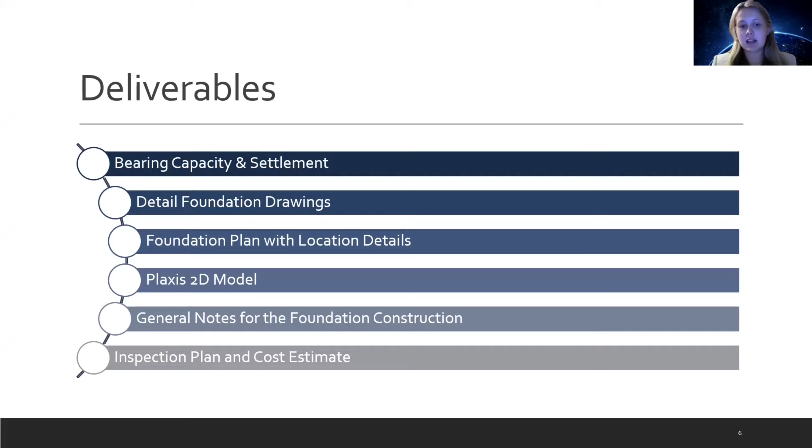The bearing capacity and settlement and the detailed foundation drawings are both completed. The foundation plan is done, and the cost estimate is almost complete. The Plaxis 2D model and the general notes and inspection plan will be completed soon.

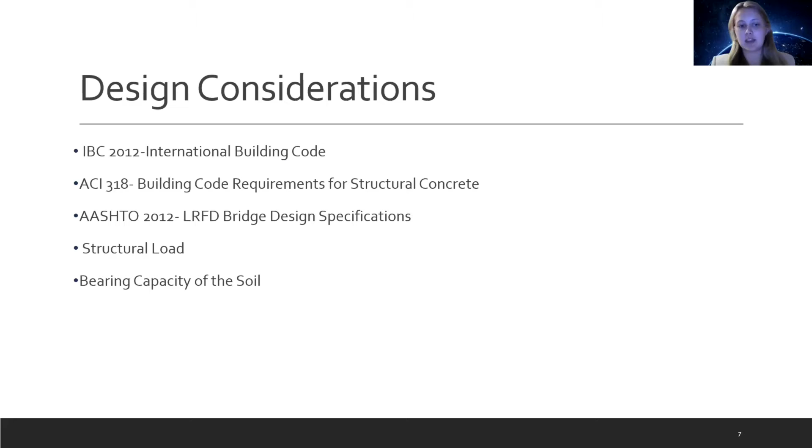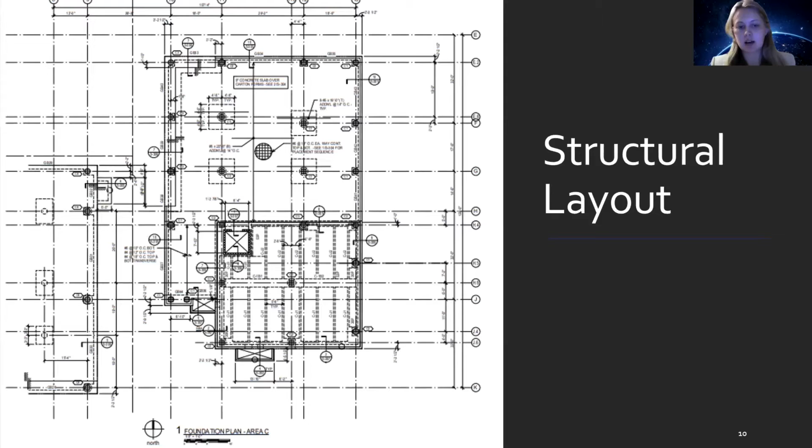For the preliminary foundation design, 2 foundations were considered: pile foundation and a shallow foundation. Here's the formulas used for the pile foundation to find the allowable load.

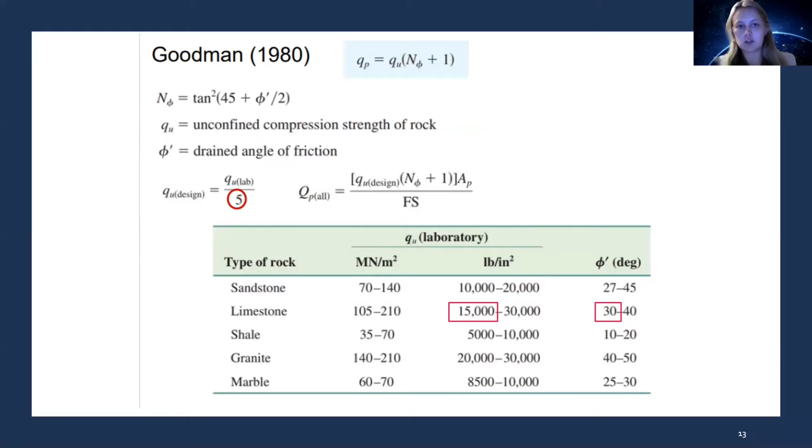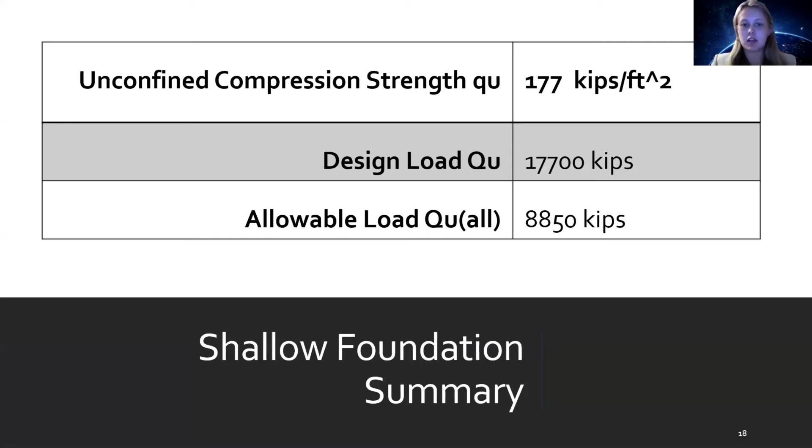The shallow foundation initial calculations resulted in an allowable load of 8,850 kips. Between the 2 of these, the deep foundation would have a much larger cost and more equipment is needed, when the shallow foundation is capable of handling the loads needed and is more economical, more cost-effective, and needs less material. So the foundation used will be a shallow foundation.

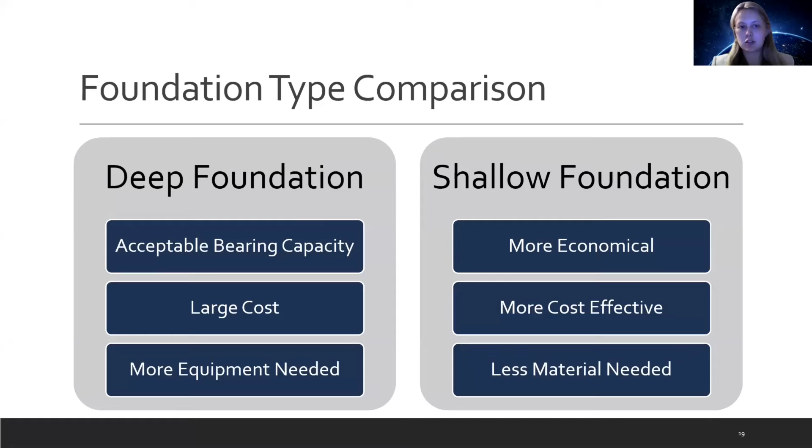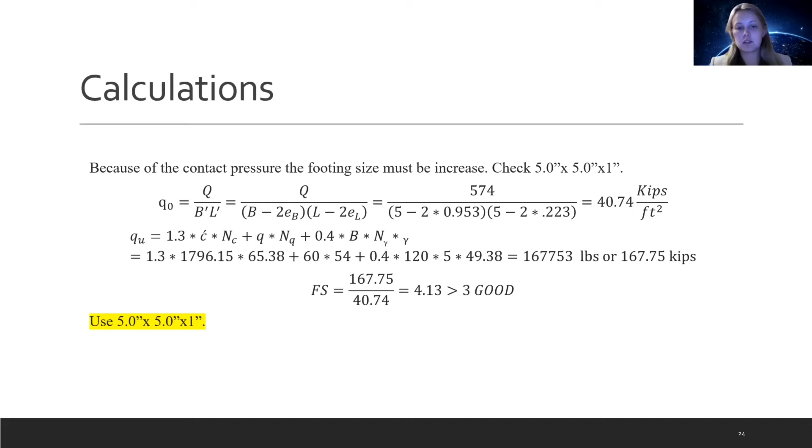Following is the shallow foundation detailed design. Here is the calculations. The foundation is to be 5 feet in both directions and 1 foot deep. That gave us a factor of safety of 4.13, which is greater than 3, so it was sufficient.

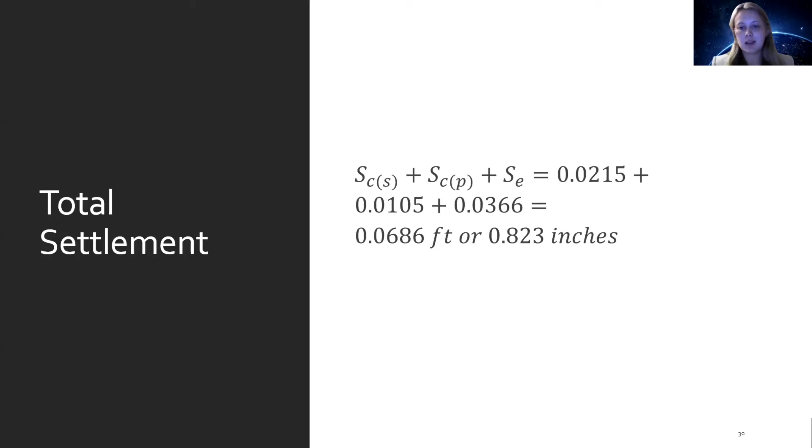Next, we checked for the settlement. The total settlement was 0.823 inches, which is less than 1, so the settlement was okay. Here are the design drawings.

The square foundation is 5 feet on both sides and has a thickness of 1 foot, and the foundation is 2 feet deep. The column dimensions provided by the engineers at K16 Consulting was a circular column with a diameter of 3 feet, so that's shown in the picture as well.

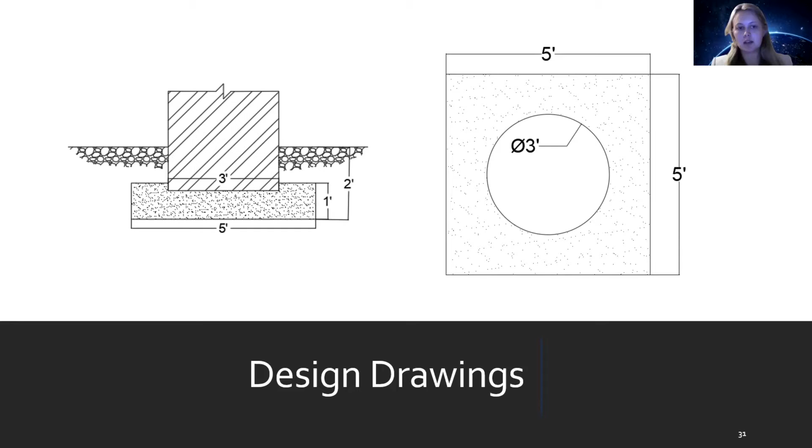Here is a breakdown of the cost estimate. The subtasks are separated, and the unit cost for each subtask, along with its coordinating number from the cost manual, is shown, and the final cost will be about $3,600 plus whatever the weight of steel is times 1,900.

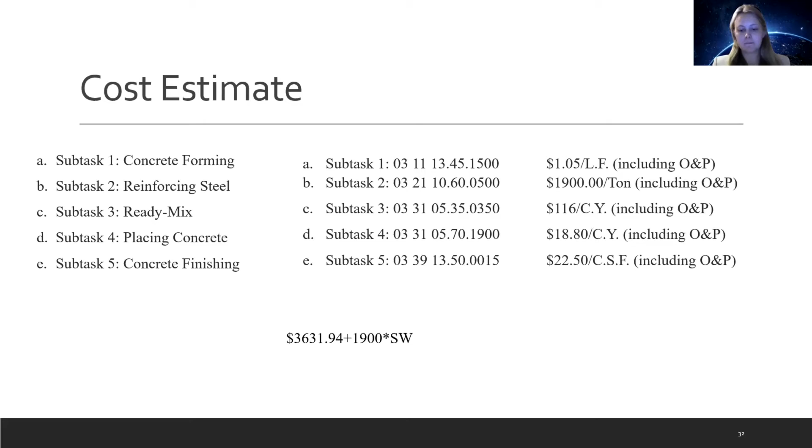Because of a lack of time, I have not yet done the steel design for the concrete footings, but that will be done shortly. Using the footings, there are 2 options that are being considered: a traditional concrete mix and a recycled aggregate mix.

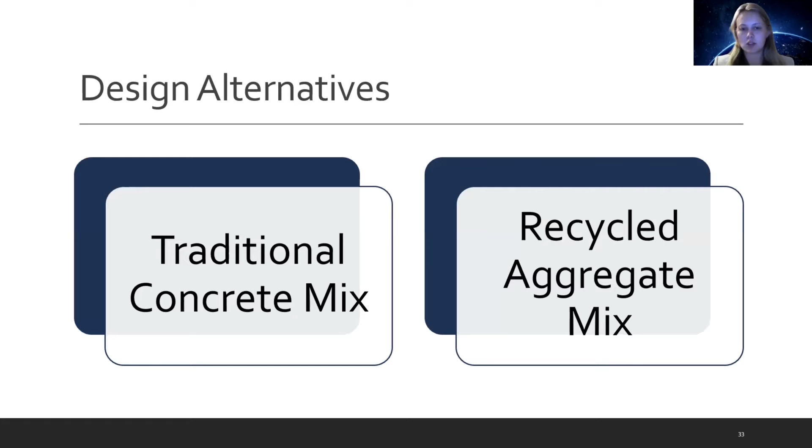The cost between the 2 will not be much different, and they'll all have the same dimensions. The only thing that'll change is what's used for the concrete mix.

The advantages and the obstacles to using a recycled concrete mix are listed below. Some of the advantages are minimizing the use of resources and supporting local economic diversity and reducing pollution from using old materials. And some barriers include the clients not wanting to use recycled aggregate due to the lack of implementation,

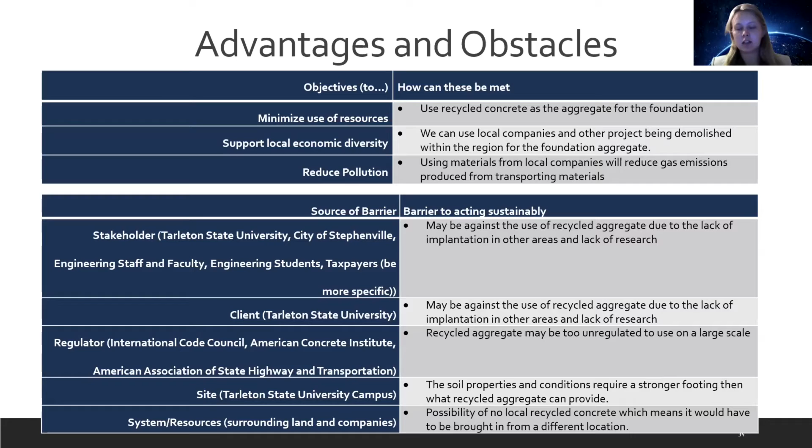or the site needing a stronger footing than what recycled aggregate can provide. So all of these will be taken into consideration when deciding between the traditional mix and the recycled aggregate mix.

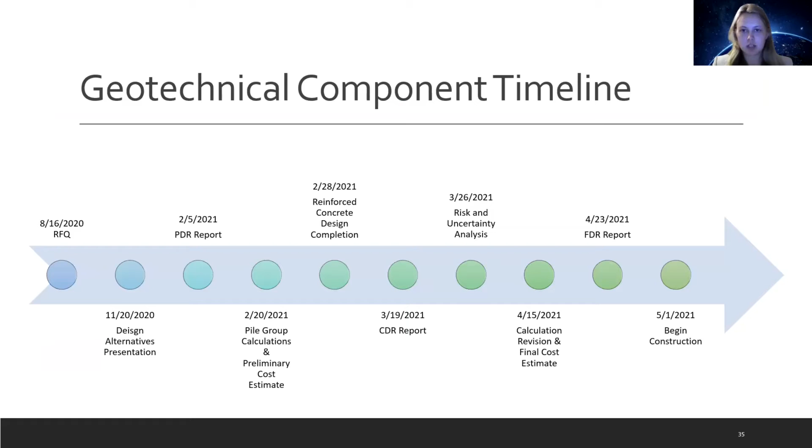Here's the geotechnical component, and I will now hand it over to Jonathan to talk about the transportation component. Thank you. Hi, my name is Jonathan Mink, and I will be talking about the transportation component portion of the project. The design objective is to design a new parking lot for the new engineering building at Tarleton State University.

The deliverables of this project will be a pavement thickness for the new parking lot, along with a joint and steel design. There will also be detailed drawings showing what the parking lot will look like, and a concrete mix will be designed along with a cost estimation for the parking lot.

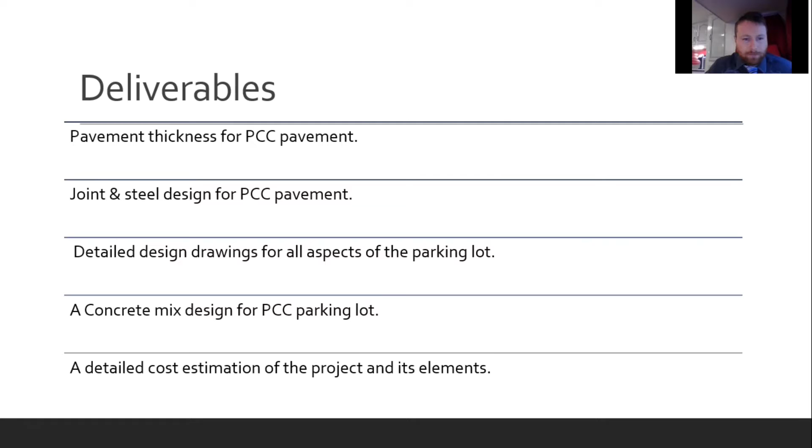The design considerations will accommodate about 45 total parking spots with 2 handicap parking spots closest to the new engineering building. There'll be a 6-inch curb running around the length of the parking lot to help manage storm water runoff, along with a 2% slope.

The total area is just a little over 26,000 square feet, with a 4-foot sidewalk running closest to the length of the new engineering building. There'll also be 2 semicircles in the middle of the parking lot on opposite ends, helping provide a green, sustainable design that reduces cost for the parking lot by subtracting steel and concrete.

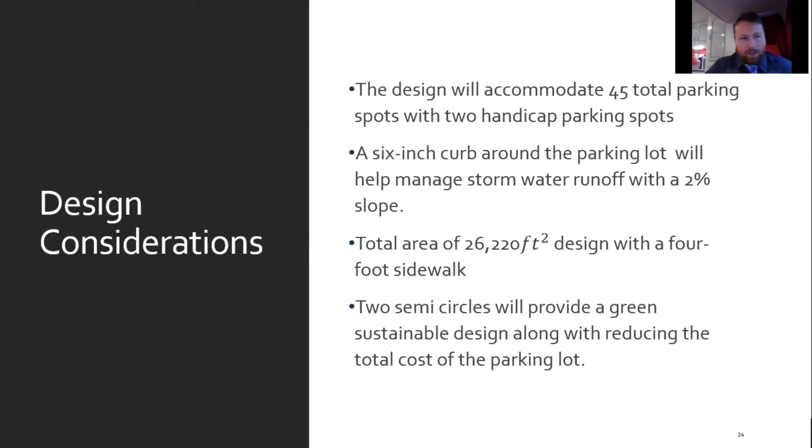Along with the area of a little over 26,000 square feet, it will require 389 yards of concrete to finish.

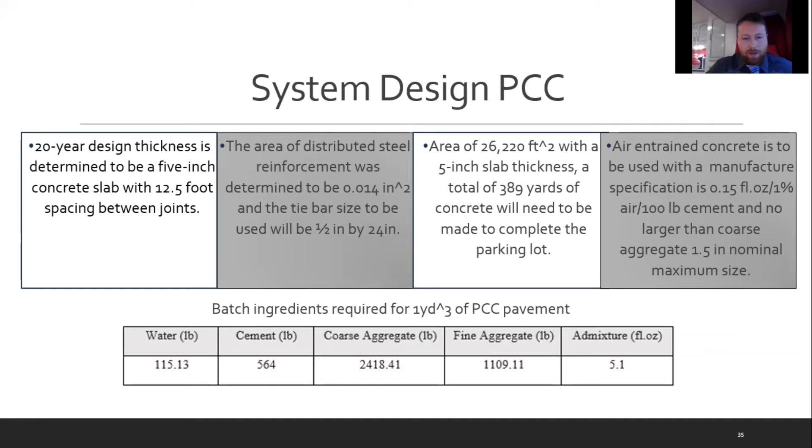An air-entrained concrete will be used per manufacturer specifications, with 0.15 fluid ounces per 1% of air per 100 pounds of cement. For 1 yard of batch ingredient, it's shown in the table at the bottom of the slide, showing how much material in pounds and ounces will be needed per yard of concrete.

The parking lot cost came in at just a little under $100,000. It'll include the concrete, forming, steel, labor, everything shown in the table below.

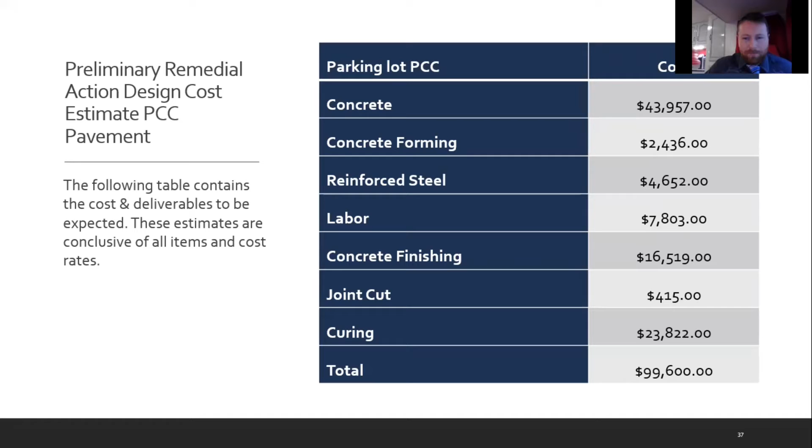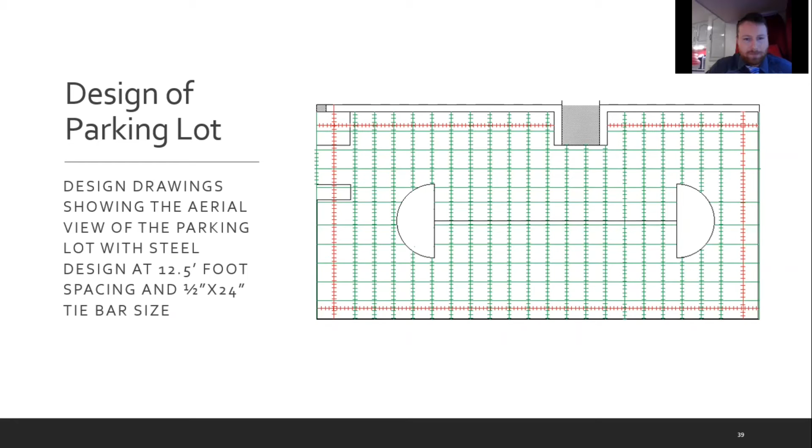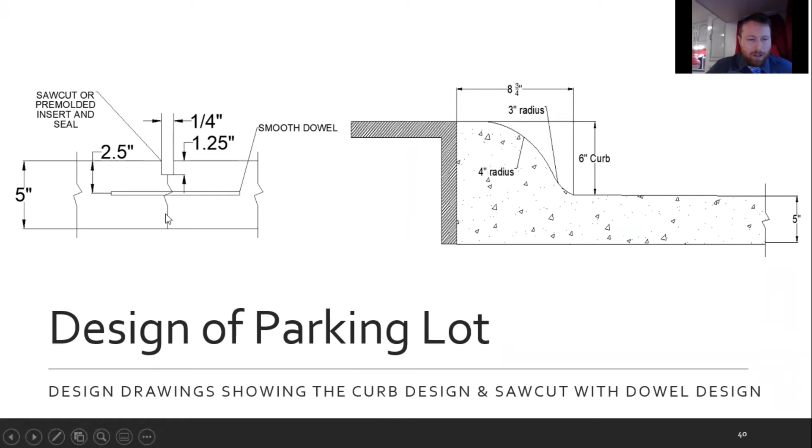The curb cutout design is also shown here in the drawing to the right, and to the left is the saw cut and pre-mold insert seal, along with the smooth dowel cutout for the concrete parking lot itself.

The timeline will be determined at a later date, and I'll be handing it off to Blake Denho to talk about the water resources part of our project.

Thank you, Johnny. I'm Blake, the water resources lead. This component of the project is tasked with designing a runoff management system to convey runoff from the proposed development.

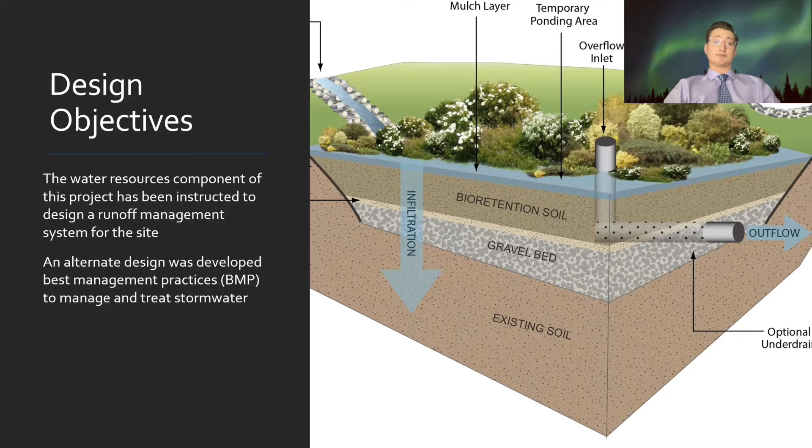An alternative design will consider best management practices to treat and contain stormwater on the site. At this stage, the proposed management system has been laid out and its components have been sized. An LID design alternative has been established that contains low-cost green components.

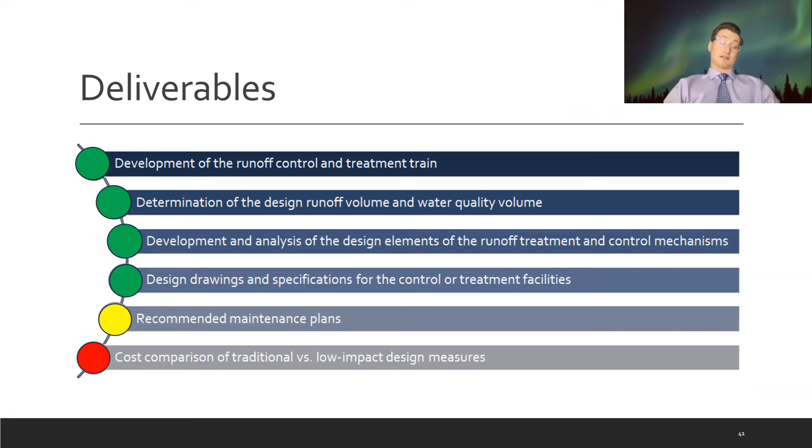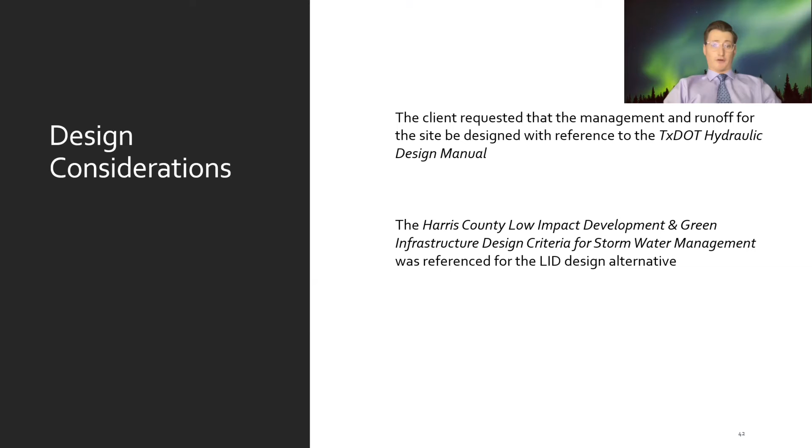Material calculations for the first alternative have been compiled and cost estimations are currently underway. The stormwater management system followed the design standards of TxDOT's hydraulic design manual, whereas the green infrastructure alternative followed that of Harris County's LID manual.

This proposed development features a parking lot, office suite, and sidewalks. These together comprise about 1/3 of the total site surface being impermeable. This is a design consideration that we must handle.

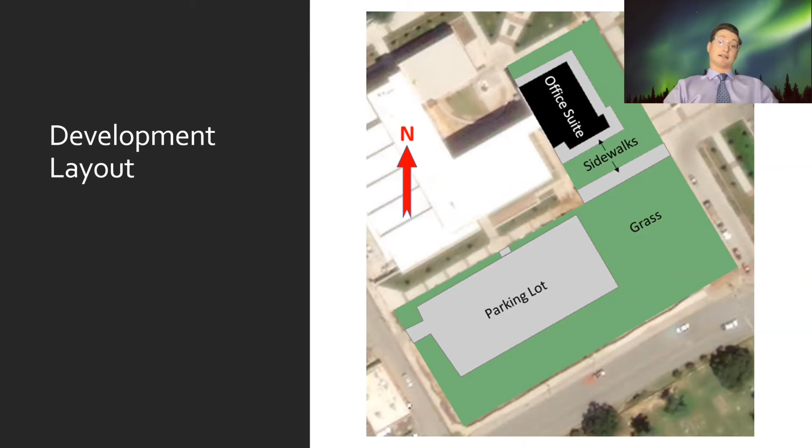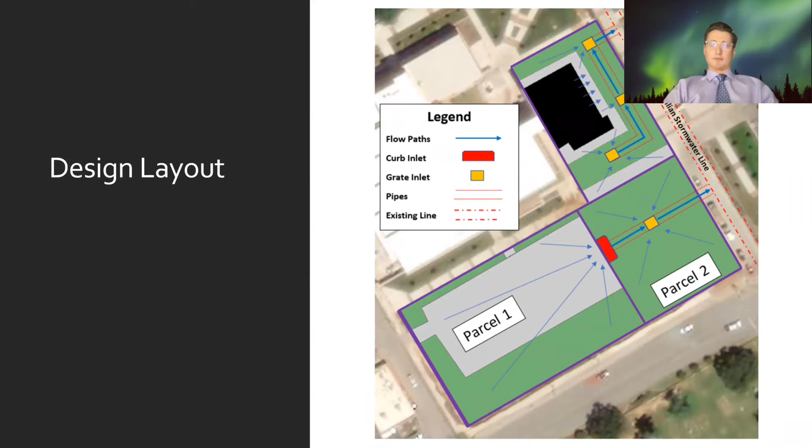The site was partitioned into parcels in order to better quantify the peak flows impacting the design's components. The design consists of a curb inlet to handle runoff from the parking lot and its respective parcel, as well as grate inlets for the rest of the site. The system directs these flows downstream through conduits into the existing stormwater line under Lillian Avenue.

An earthen berm partitions the parcels. Slots are placed around the curb inlet to convey any carryover discharge from parcel 1 for further capture downhill.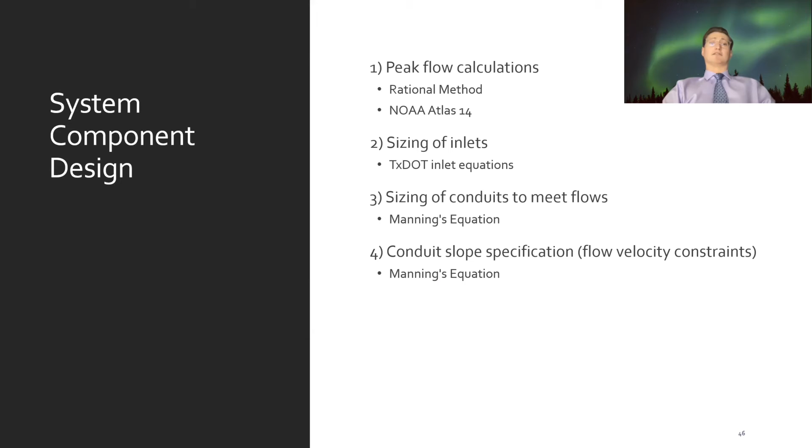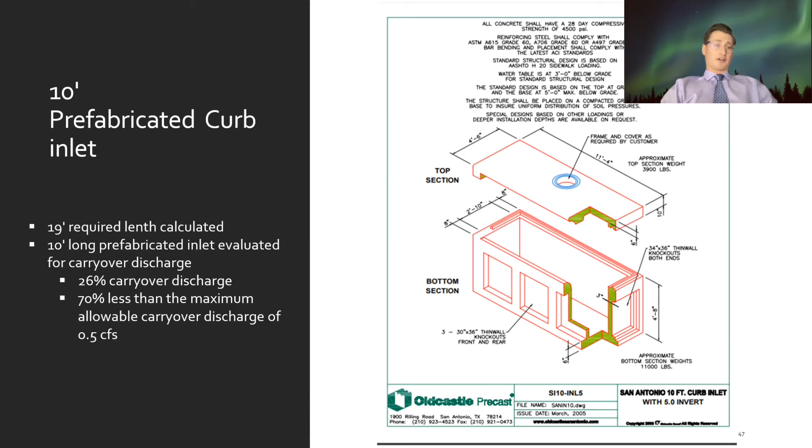Prefabricated components with these parameters were selected for ease of construction and low cost. It was calculated that a 19-foot long curb inlet would be needed to capture all of the runoff of parcel 1. However, the carryover discharge associated with the 10-foot long inlet was found to be within TxDOT specification, and a prefabricated inlet was selected.

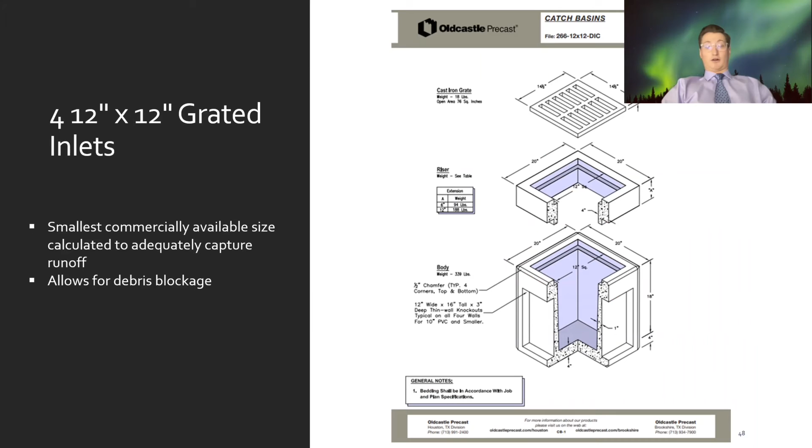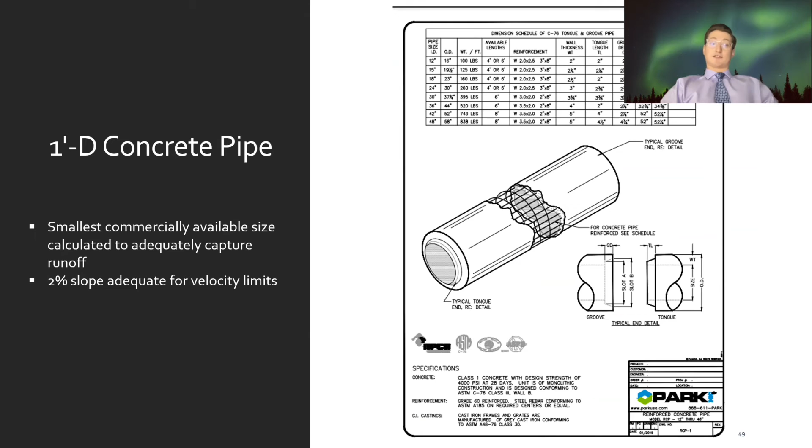The smallest commercially available grated inlets were calculated to be sufficient as well in all 4 locations they exist. The smallest commercially available concrete pipe was also found to be adequate. Mirroring that of the land surface, a 2% slope was calculated to meet the minimum and maximum velocity constraints.

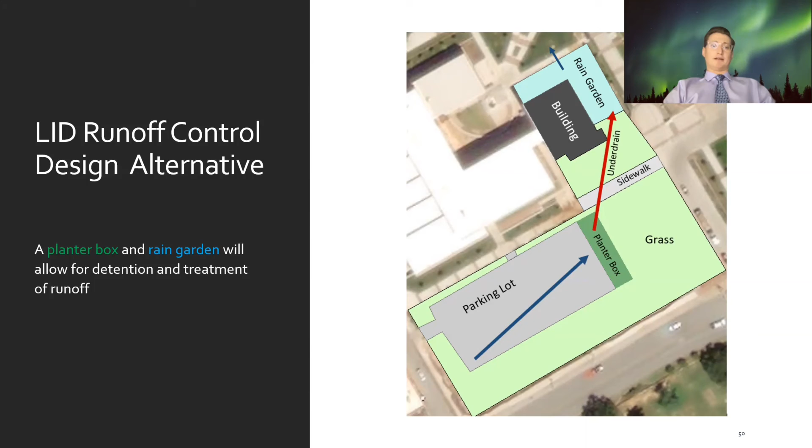The LID alternative's components were selected based upon their ease of implementation, minimization of cost, and maintenance, as their size will be sized so that they can capture the first inch of runoff as specified. Its management train directs runoff from impermeable surfaces to detention components which allow for water quality treatment and detention.

A cost estimate for the designs will consider materials, excavation, pipe installation, labor, maintenance, and additional grading. The upcoming tasks with this project component include life cycle analysis, a risk and uncertainty analysis, and finalization and specifications of cost estimates. Thank you.

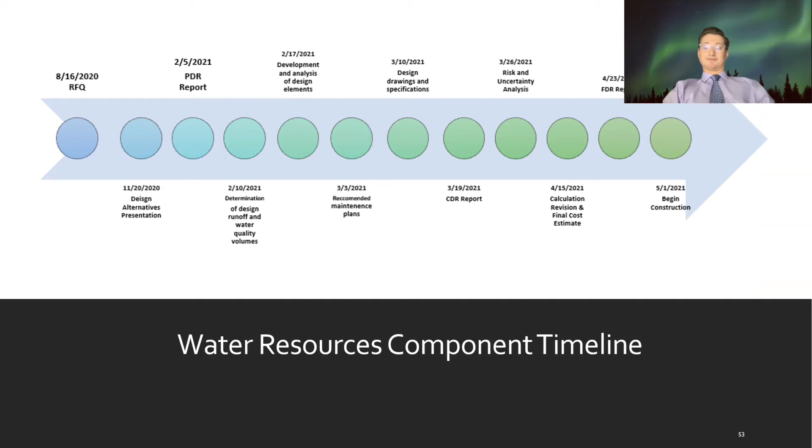Tarleton State University has been recommended to reduce their lead concentration levels from 800 milligrams per kilogram to below 400 milligrams per kilogram before any further construction can begin on the office suite. Deliverables to be included are the design criteria, design schematics, preliminary lab results, and cost estimations.

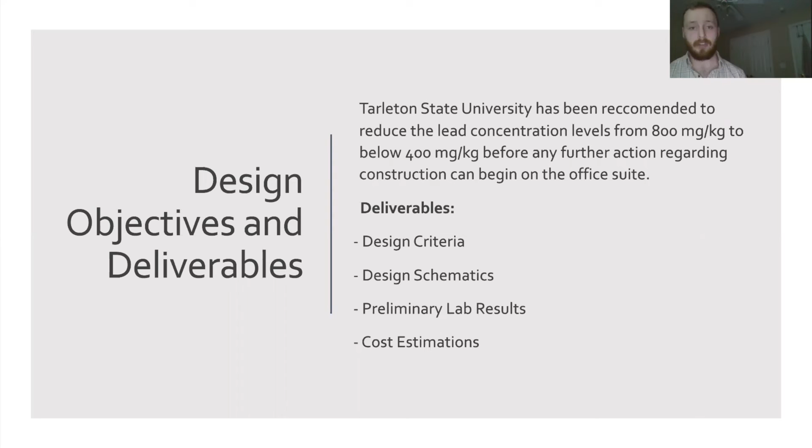We know from the Phase 1 site assessment that the construction site was near a former lead smelting factory that had been demolished and inactive for multiple years prior. Evidence showed that these fine-sized particles were released directly into the air and were carried to the site by wind and rain.

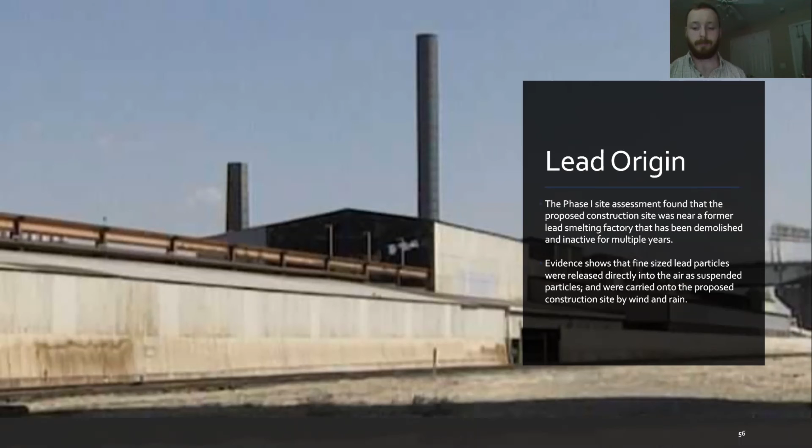Based on the soil boring logs, we can see that the soil does not become saturated until 21 feet in depth, which means most in situ processes can't be done without having to completely saturate the soil with an electrolyte and chemical solution that can be very detrimental to the environment.

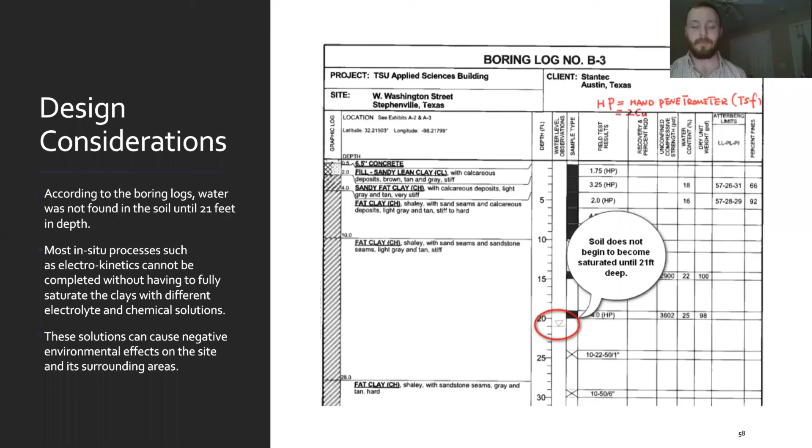That's why we recommend an ex situ electrochemical remediation, which involves excavating the soil, transporting it to our remediation site where we can pre-treat it with a KCl and acetic acid solution, and then send it through our agitator table where the lead can be collected, run through a water wash, and then sent to a landfill. From there, the soil will be collected from the agitator table and transported to our electrokinetic reactor to get another portion of the lead out, and then that portion will be sent to the landfill, and then the soil can be sent back to the construction site to be mixed and compacted.

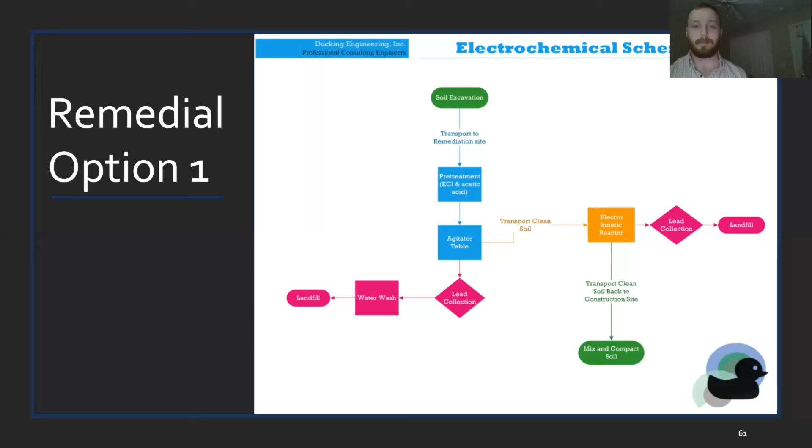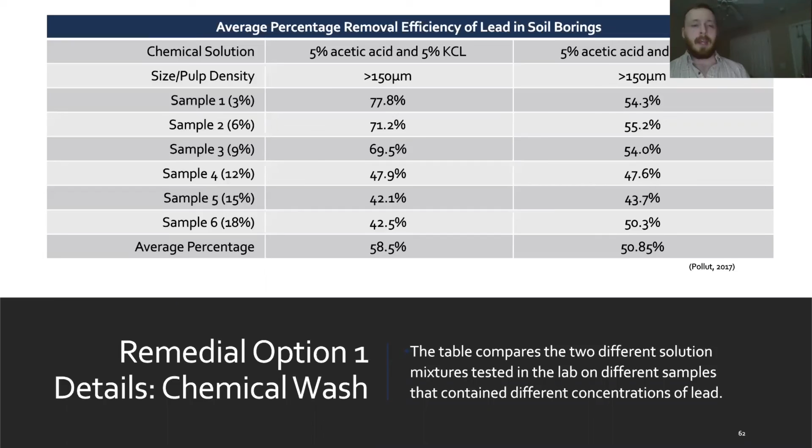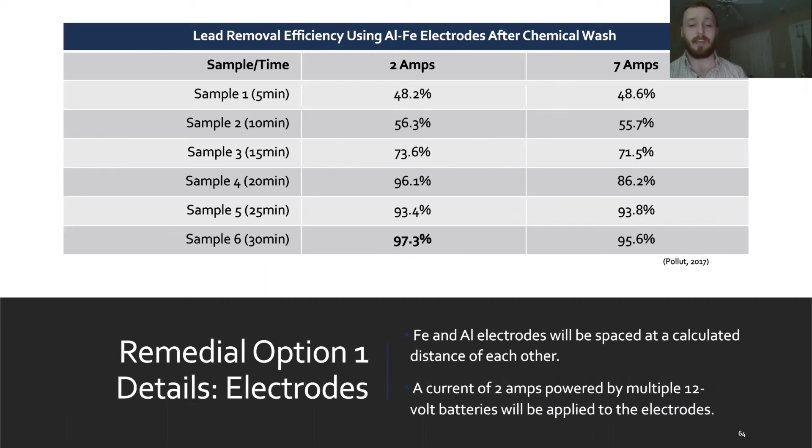Based on some of the soil that we got from our soil borings, we were able to run a test with a 5% acetic acid and KCl solution at different pulp densities and achieve a highest average percentage of 58.5% with just a soil wash. From there, we took that same soil and ran it through a small batch on our electrochemical reactor for a high of 30 minutes, which produced a 97.3% reduction in total.

Remedial option number 2 is almost the same as number 1, except we'll be omitting the electrokinetic process and just doing a soil wash, which would be done the same way: excavating the soil, transporting it to the remediation site, and pre-treating it with KCl and acetic acid, which will then be run through the agitator table, in which lead will be collected, washed with distilled water, and sent to a landfill. Then that soil will be sent back to the construction site to be mixed and compacted.

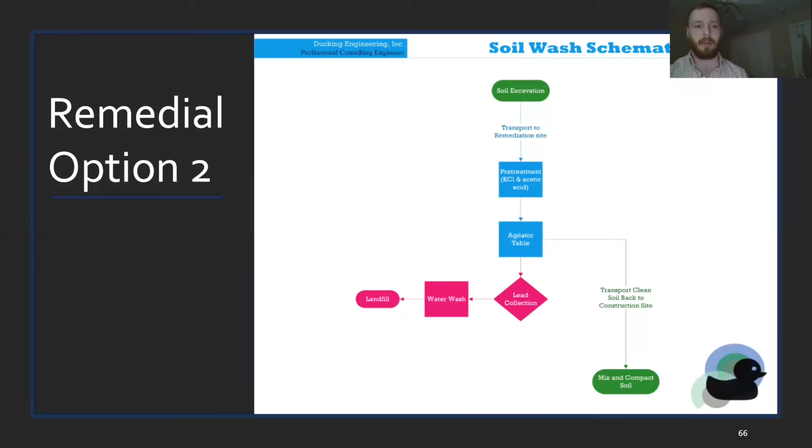As we saw before, the 5% acetic acid and KCl solution yielded the best percentage at 58.5% on average.

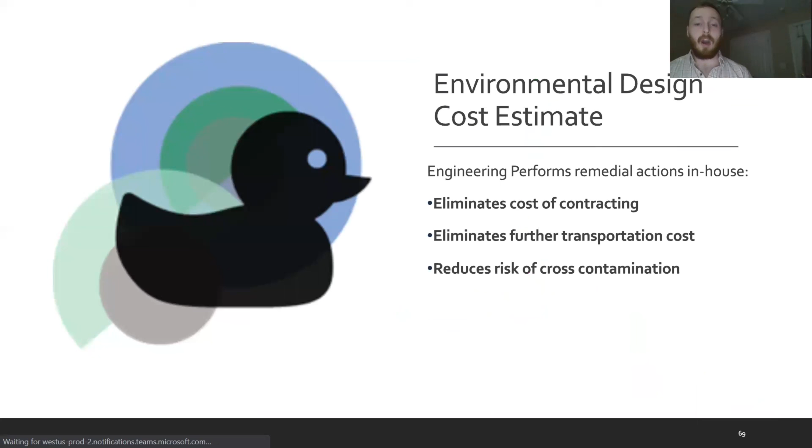Next, we'll go through the cost estimates of both of these designs. The cost estimate for the electrochemical design comes out to be almost $3.4 million, of which the electrokinetic process and soil washing process are charged at a per cubic yard basis. Both of these include cost of electricity, cost of labor, and the actual design for this process.

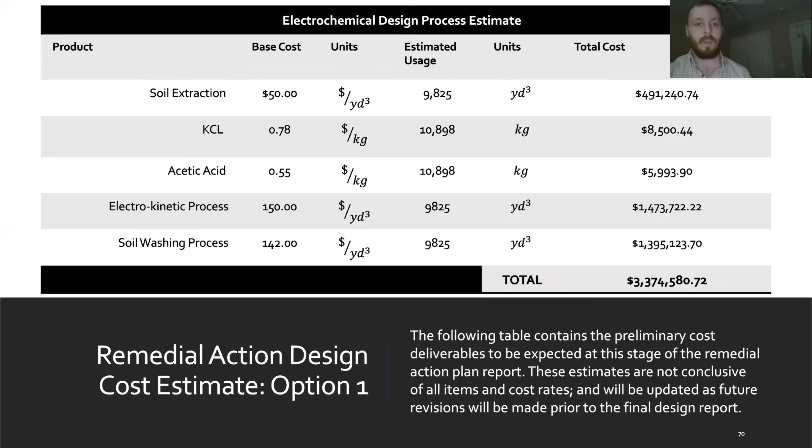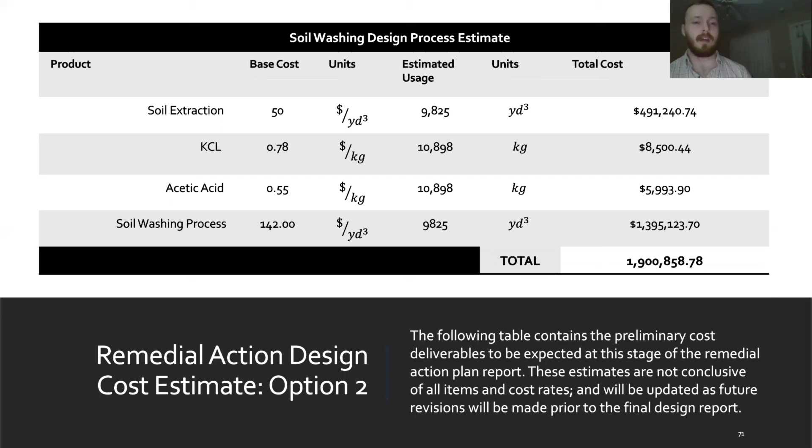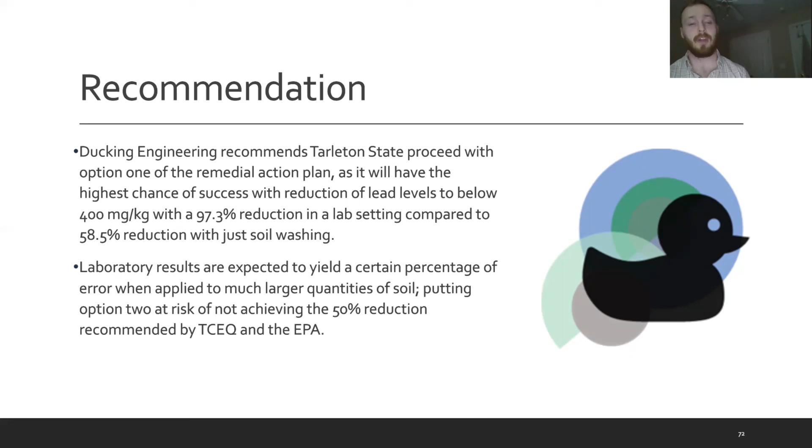It should be noted that these are laboratory results, and you are expected to yield a certain percentage of error when applying to a much larger quantity of soil in a real-life situation, which puts option 2 at the risk of not achieving the 50% reduction recommended by TCEQ and the EPA.